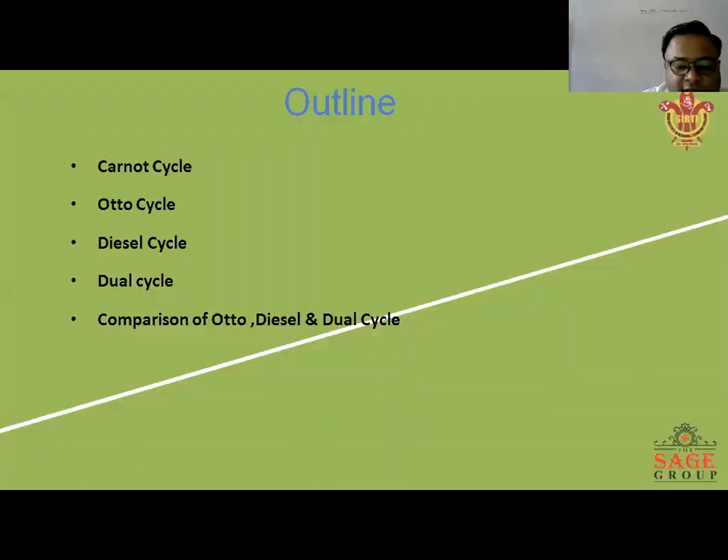The Carnot cycle is not a practical cycle, as already discussed in the previous class. There are two reservoirs, a high temperature reservoir and a low temperature reservoir, but there is no chance of it being absolutely 100% efficient.

This is because of the ideal processes which are used in the cycle, which prevent the cycle efficiency from being 100%.

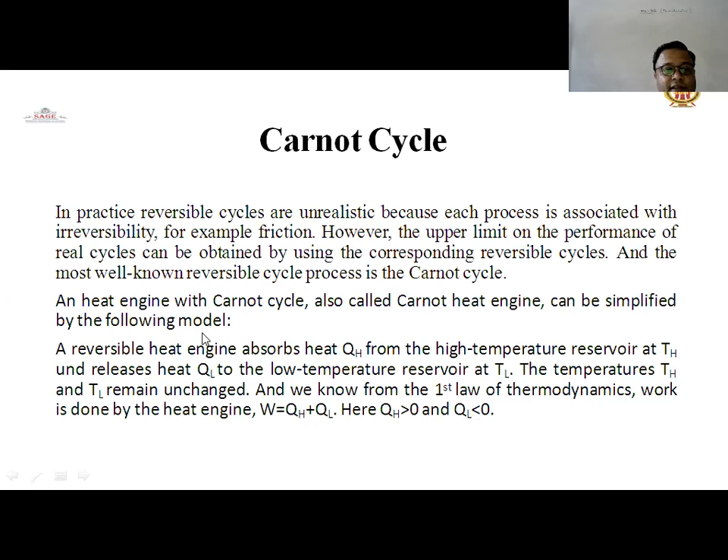This heat engine with the Carnot cycle can be simplified by the following model. There is a high temperature reservoir working at temperature TH, and a low temperature reservoir working at the lowest temperature TL.

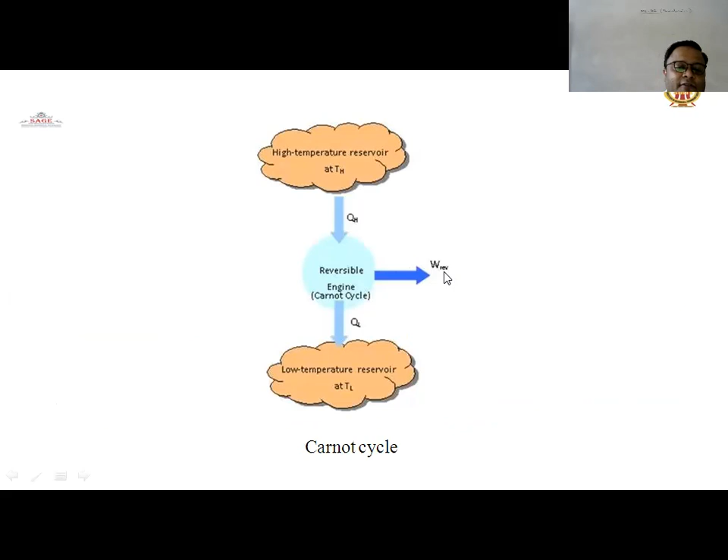A reversible heat engine operates between these two reservoir temperatures, the high temperature and the low temperature, and after all the working, the net work done by the reversible cycle is QH minus QL.

In process 1 to 2, isothermal expansion, heat is supplied by external sources. Process 2 to 3 is isentropic expansion, in which entropy remains constant.

Due to this, heat transfer remains zero during 2 to 3. Process 3 to 4 is isothermal compression, where heat rejection takes place to the sink body, and process 4 to 1 is isentropic compression, where heat transfer is again zero.

This is the Carnot cycle, the PV diagram explaining how the engine works. But in practice, Carnot cycle efficiency cannot be achieved at 100% because some of the processes involved in the cycle are lacking and cannot be fully achieved in the practical case.

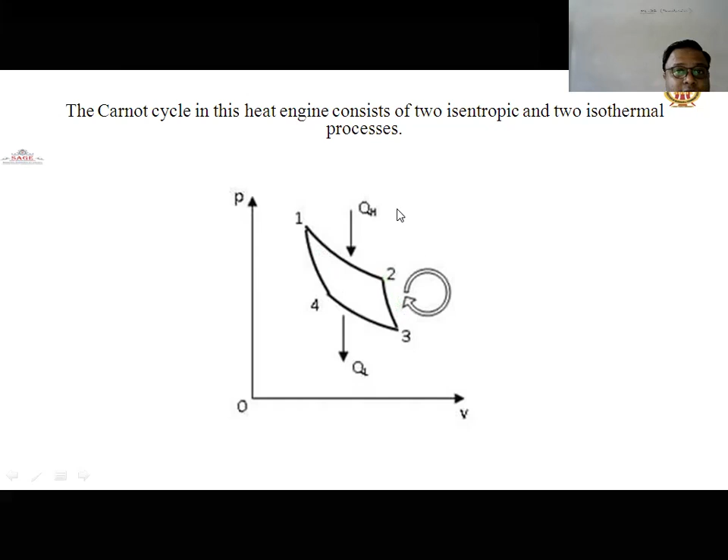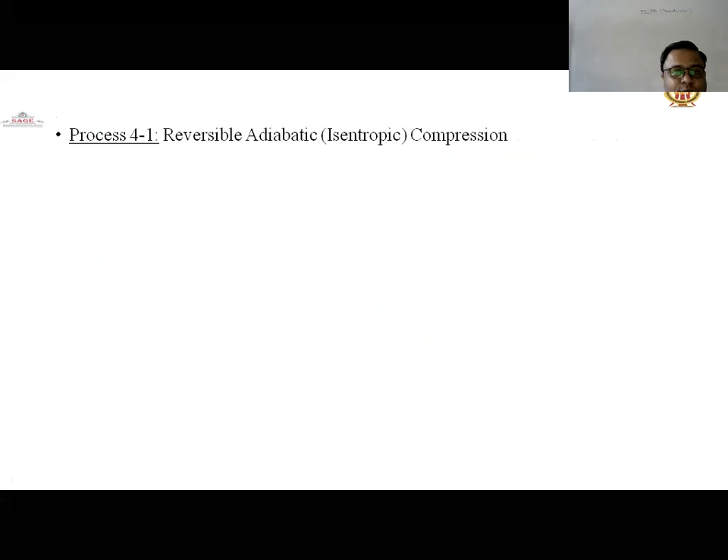These processes were already discussed in the diagram. Process 4 to 1 is the last process, adiabatic isentropic compression, where the engine is perfectly insulated so that no heat is lost and absorbed, and the gas continues being compressed slowly until the temperature rises.

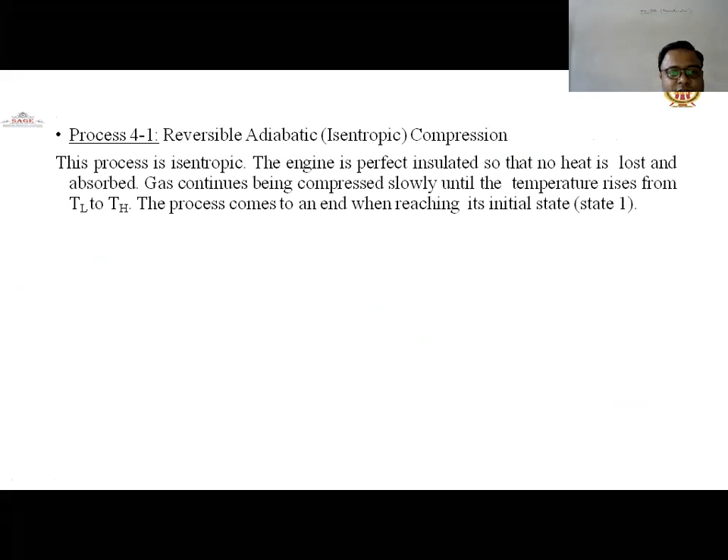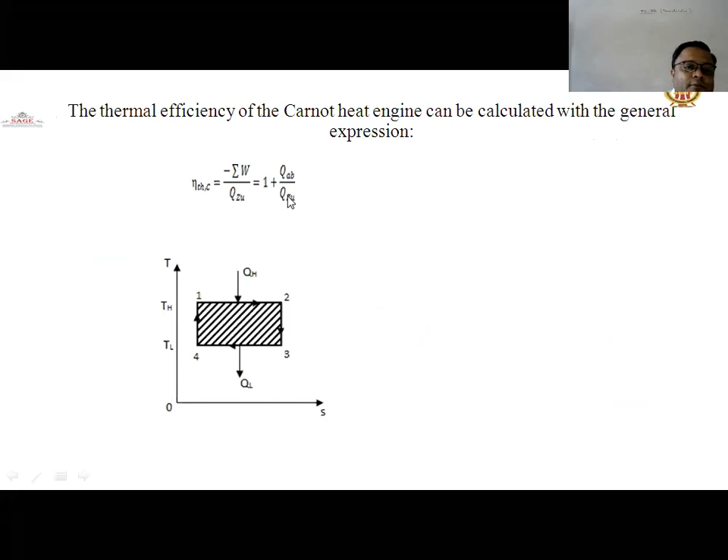Using the TS diagram, we obtain the parameter 1 minus TL by TH. This is the main fundamental equation of the thermal efficiency of the Carnot cycle, and this equation is also referred to as the Carnot efficiency.

इसको Carnot cycle की efficiency के रूप में भी जाना जाता है। तो जो आप देख रहे हैं कि थर्मल efficiency Carnot cycle की इन प्रैक्टिकल केस 100% नहीं रहती है।

उस efficiency को 100% बनाना है तो प्रोसेस ऐसी बनानी पड़ती है ताकि वो रियल प्रैक्टिस में वर्क कर सके और इफिशिएंसी को इम्प्रूव कर सके। किसी भी साइकिल या इंजन की इफिशिएंसी 100% नहीं होती है।

क्योंकि ऐसी मशीन जो कि विदाउट कंज्यूमिंग ऑफ एनी एनर्जी, इट विल प्रोड्यूस द कंटिन्यूअसली वर्क - हाउ इट इज पॉसिबल? ऐसी कोई भी मशीन बनाना इम्पॉसिबल है जो कि कंटिन्यूसली वर्क प्रोड्यूस करे, किसी भी एनर्जी को कंज्यूम किए बगैर।

सपोज आपकी मोटरसाइकिल है, यदि आप सोचें कि चला लें कंटिन्यूसली बिना पेट्रोल के, तो हाउ इट इज पॉसिबल इन अ प्रैक्टिकल केस? दिस इज द परपेचुअल मोशन ऑफ द मशीन फर्स्ट काइंड, जो कि इम्पॉसिबल केस है।

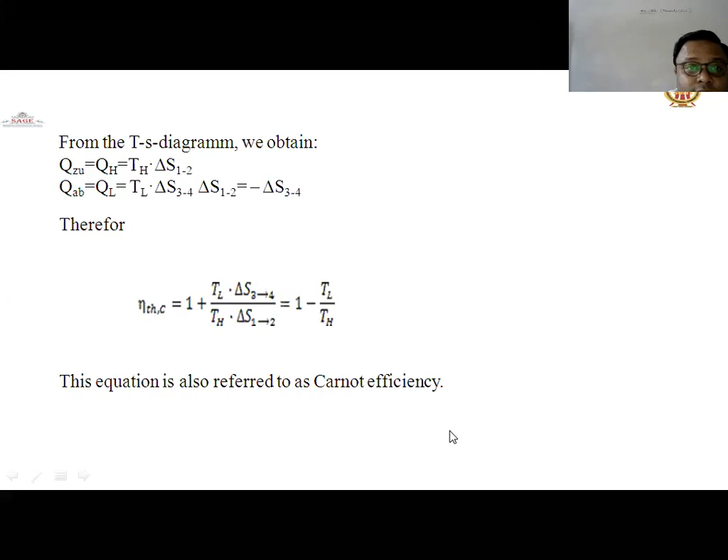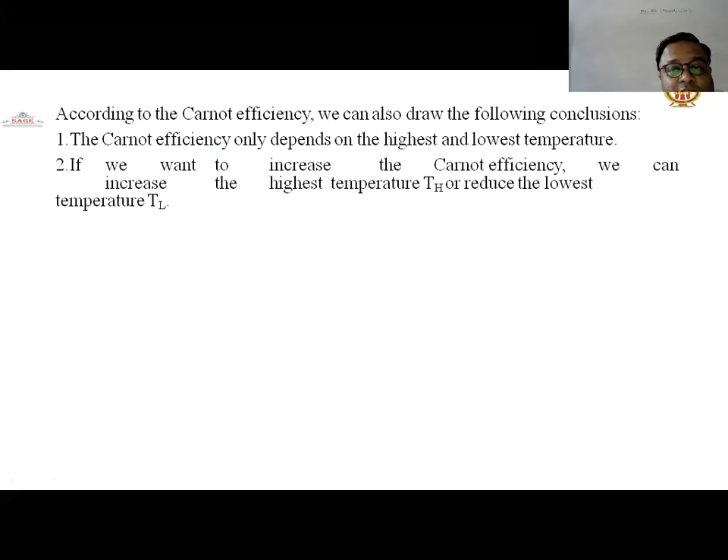यदि आपको चाहिए कि कार्नोट साइकिल की एफिशिएंसी बढ़ जाए, तो आप हाईएस्ट टेम्परेचर ज़्यादा से ज़्यादा बढ़ा दीजिए या लोएस्ट टेम्परेचर को कम से कम कर दीजिए। और यदि कार्नोट एफिशिएंसी और बढ़ानी है, तो उसके लिए दूसरी मेथडोलॉजी भी अपनानी पड़ती है - रीजनरेशन करिए, रीहीटिंग करिए।

बट इट इज नॉट पॉसिबल इन अ प्रैक्टिकल केस बिकॉज ऑफ सम लिमिटेशंस। कुछ लिमिटेशन हैं जिसकी वजह से हम एडिशनल मेथड अडॉप्ट नहीं कर पाते हैं। तो कार्नोट हीट इंजन की एफिशिएंसी हमेशा कम रहती है 1 से।

यदि इंजन की एफिशिएंसी बढ़ानी है तो उसके लिए हमें कुछ काम करना पड़ता है या उसे एडिशनल आउटपुट देना पड़ता है, जिसकी वजह से आपको इनपुट देना पड़ता है ताकि हम उसमें कुछ वर्क डन कर सकें।

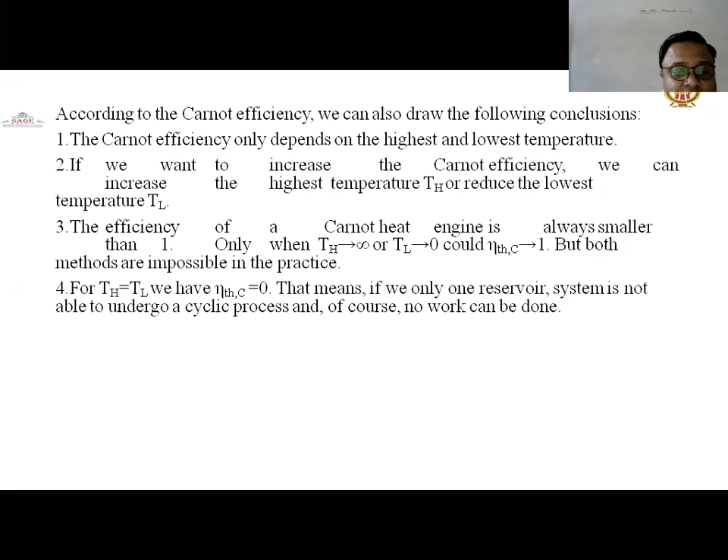यहाँ पे TH इक्वल टू TL यदि हम लेके चलते हैं तो कार्नोट साइकिल एफिशिएंसी 0 हो जाती है, बिकॉज TH इज इक्वल टू TL। That means if only one reservoir, the system is not able to undergo a cyclic process।

और इस केस में कोई भी वर्क डन आपको नहीं मिलेगा, no work can be obtained। As mentioned above, the Carnot cycle is a reversible process which delivers the most work output for a heat engine operating between the same temperature limits।

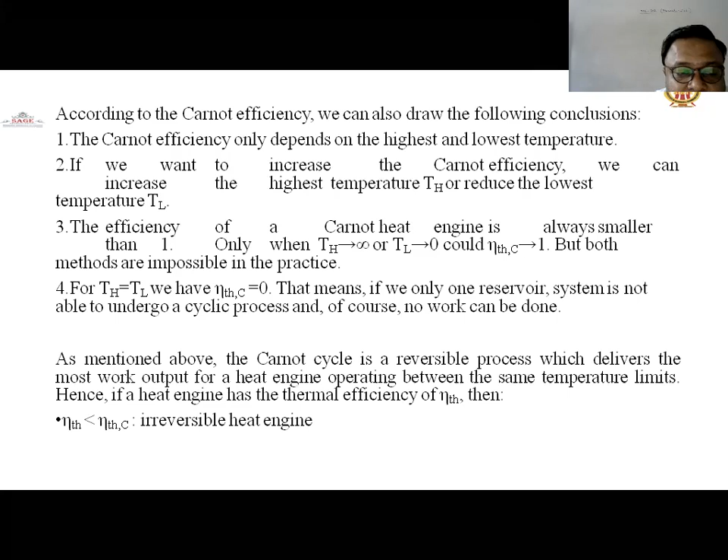If the heat engine has a thermal efficiency, then the thermal efficiency of the normal engine is less than the thermal efficiency of the Carnot engine, that is called an irreversible heat engine.

इस केस में हम बोल सकते हैं कि यदि कार्नोट साइकिल एफिशिएंसी बहुत ज़्यादा है तो उस केस में जो नॉन रिवर्सिबल से चला इंजन है, उस इंजन की एफिशिएंसी बहुत कम रहेगी।

दिस इज द फंडामेंटल। तो थर्मल एफिशिएंसी इरिवर्सिबल या बोलना चाहिए नॉर्मल इंजन की कार्नोट के बराबर है, इट मींस द रिवर्सिबल हीट इंजन है।

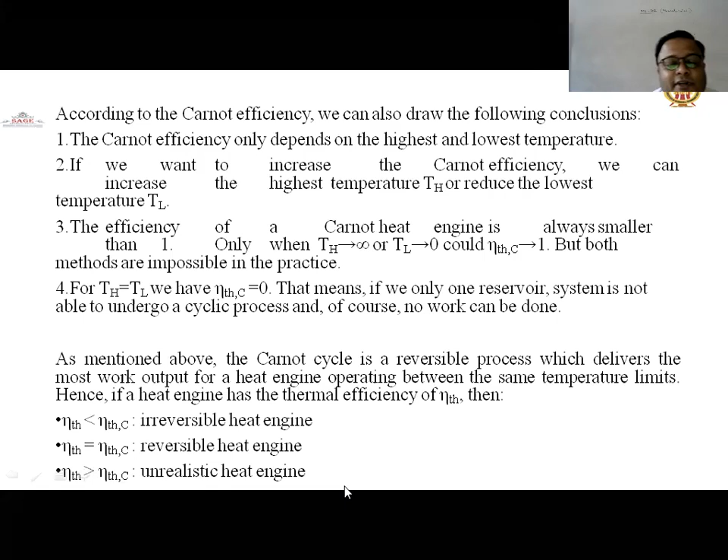एंड द थर्ड वन इज व्हेन थर्मल एफिशिएंसी ऑफ द नॉर्मल इंजन इज ग्रेटर दैन कार्नोट एफिशिएंसी, दैट इज द अनरियलिस्टिक हीट इंजन। ऐसा इंजन बना पाना इम्पॉसिबल रहता है जिसकी एफिशिएंसी कार्नोट इंजन की एफिशिएंसी से ज्यादा रहे।

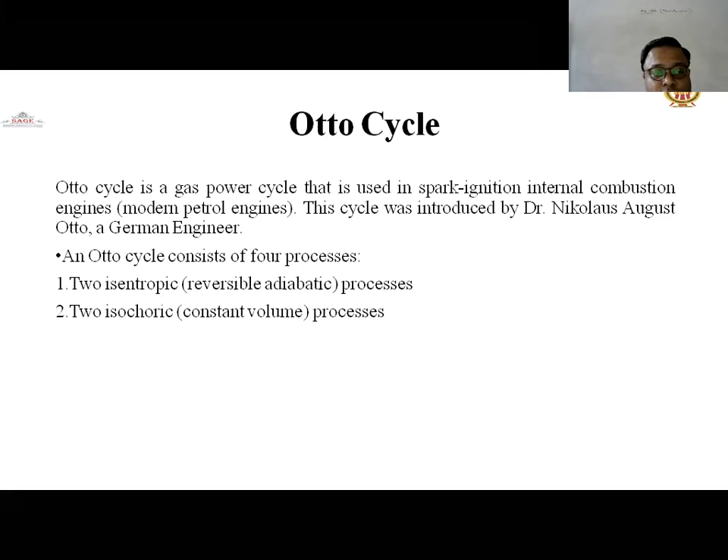ऑटो साइकिल की हमने ऑलरेडी बात की थी, निकोलस अगस्ट ऑटो नाम के साइंटिस्ट ने, जो कि जर्मन इंजीनियर था, उसने ऑटो साइकिल को बताया था। इसका यूज पेट्रोल इंजन की गाड़ियों में किया जाता था। इट कॉन्सिस्ट्स ऑफ 4 प्रोसेस - दो आइसेंट्रोपिक होती हैं, रिवर्सिबल एडियाबैटिक, और 2 आइसोकोरिक होती हैं।

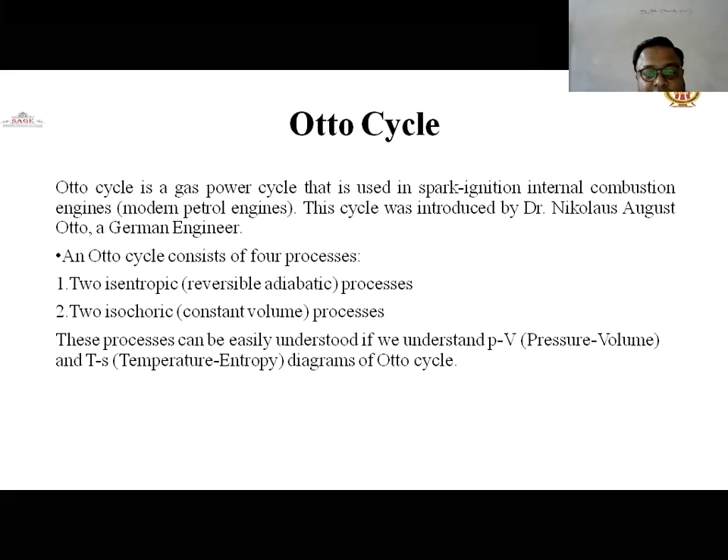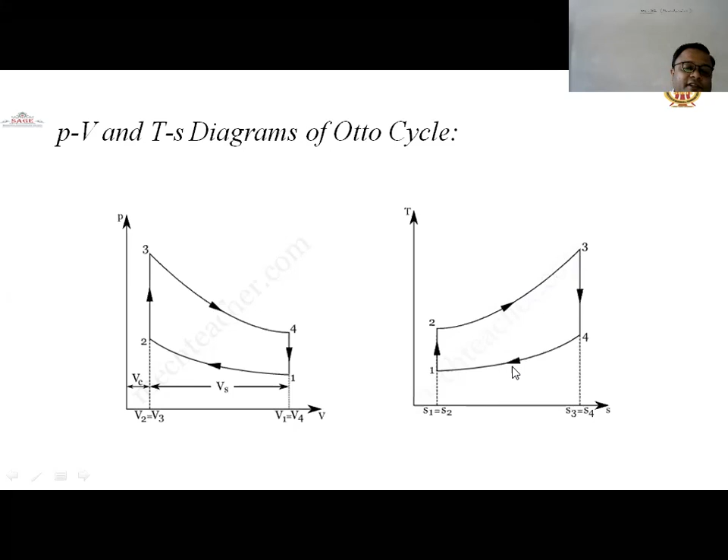The TS diagram shows the heat transfer, how much amount of heat is added in the heat addition process, and how much amount of heat is rejected in the heat rejection process, which is taking place in the constant volume process.

These are the processes already discussed in the Otto cycle. Process 1 to 2 is isentropic compression, when the piston moves from BDC to TDC, entropy remains constant, heat transfer is 0, pressure increases from initial to final condition, temperature increases from T1 to T2, and volume decreases from V1 to V2.

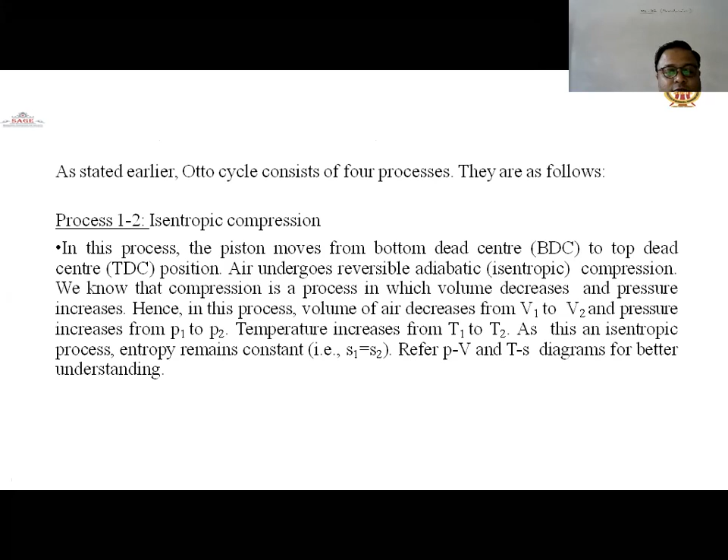The process 2 to 3 is constant volume heat addition, in which heat is supplied. During this constant volume process, heat supply is represented by mCv(T3 minus T2), where m is the mass, Cv is the specific heat at constant volume.

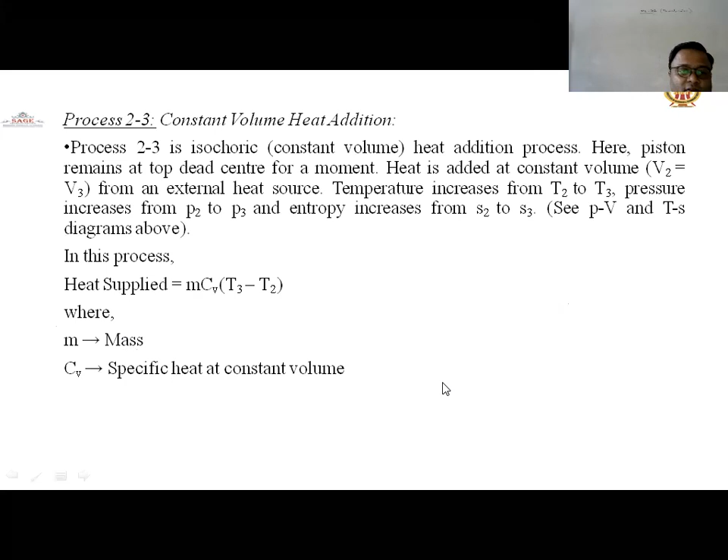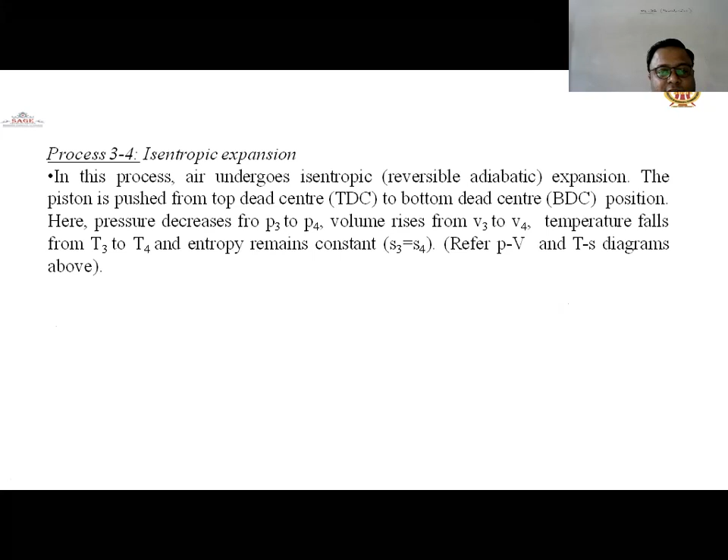Process 3 to 4 is isentropic expansion, in which the expansion of gases takes place, and the piston goes from TDC to BDC, with entropy remaining constant because of the isentropic expansion.

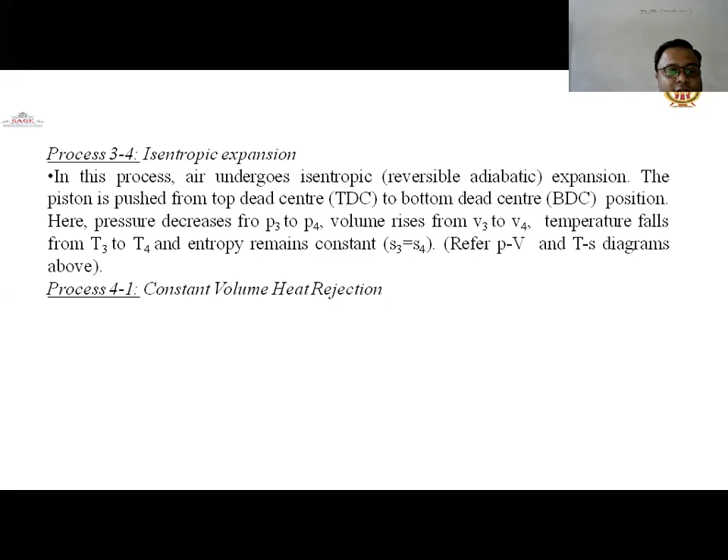4 to 1 is constant volume heat rejection, in which exhaust gases escape to the atmosphere. The total volume remains constant during this process, temperature decreases from T4 to T1, and entropy decreases due to the heat rejection process, so entropy decreases from S4 to S1.

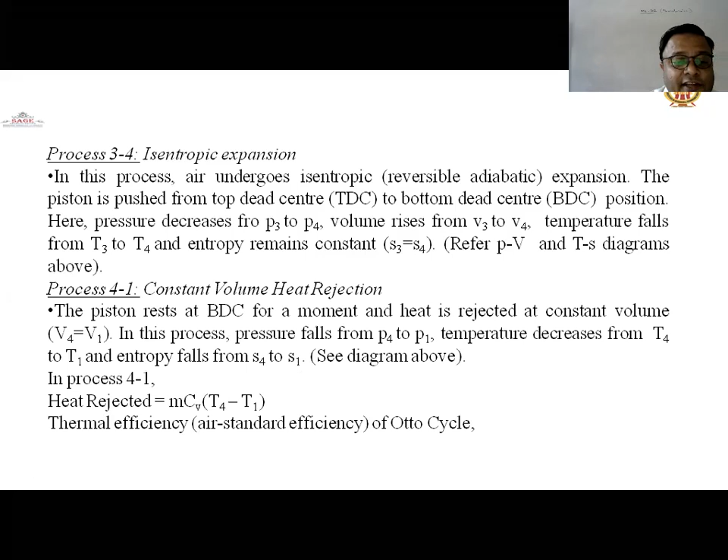The heat rejection is represented by mCv(T4 minus T1). This is the mathematical equation. Thermal efficiency equals mCv(T3 minus T2) minus mCv(T4 minus T1), all divided by the heat supply mCv(T3 minus T2).

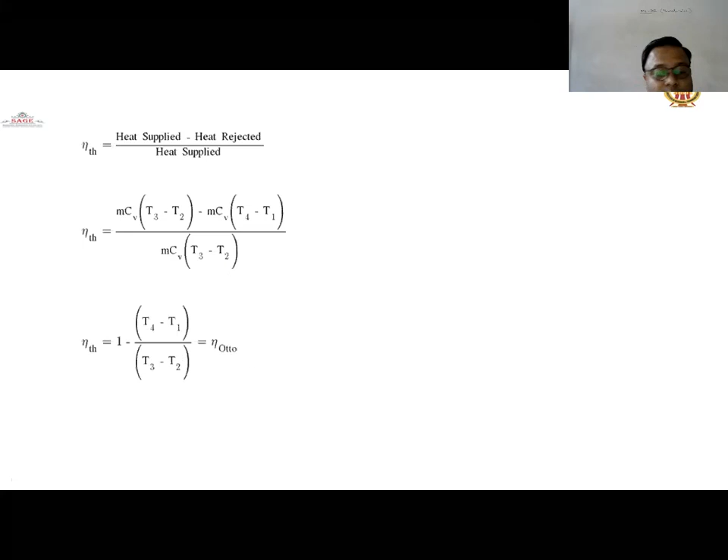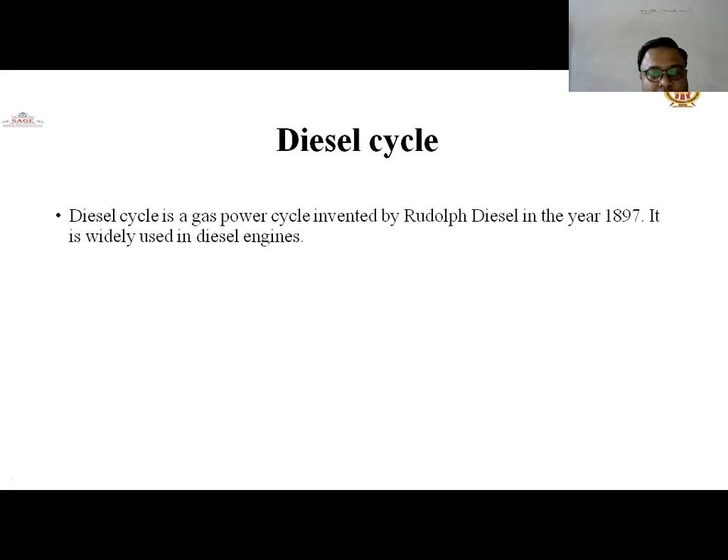In fact, in this case only air enters from the outside into the combustion chamber or compressor side, and this cycle's heating is done at constant pressure instead of constant volume. The Diesel cycle can be understood well if you refer to the PV and TS diagrams.

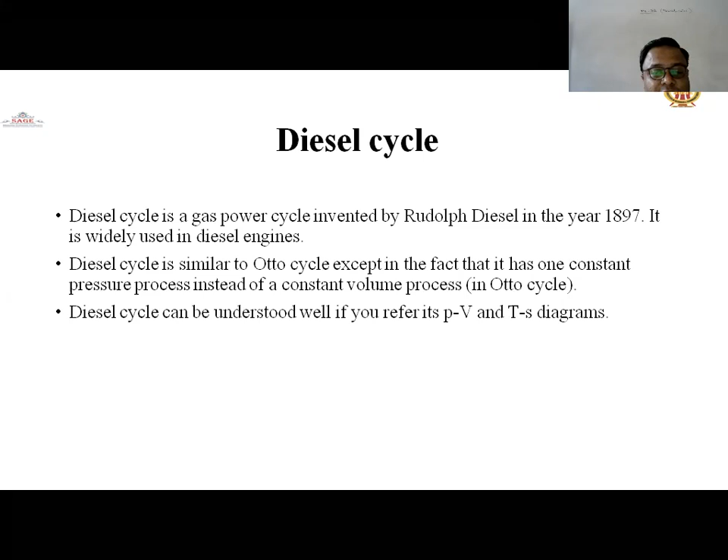At point 2, fuel is admitted into the combustion chamber from the fuel injector side, and heat addition takes place. After the fuel and air combine through the fuel injection process, combustion is initiated, continuing until it is cut off at point 3.

This is the constant pressure heat addition. After that, expansion takes place - 3 to 4 is the process of isentropic expansion, in which entropy remains constant because of the isentropic expansion going on.

4 to 1 is constant volume heat rejection, in which heat goes out to the outside in the form of exhaust gases into the atmosphere.

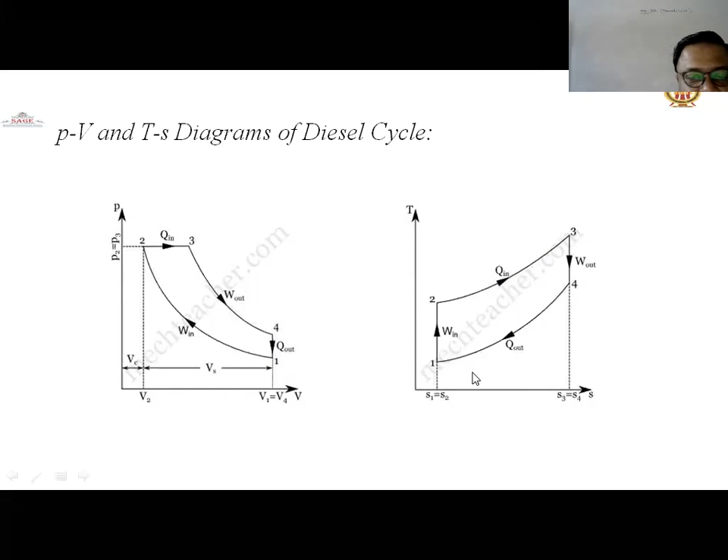Process in the diesel cycle: isentropic compression. The piston moves from bottom dead center to top dead center. Air is compressed inside the cylinder. Pressure increases from P1 to P2, temperature increases from T1 to T2, and volume decreases from V1 to V2. Entropy remains constant. Work is done on the system in this process, denoted by Win in the diagram above.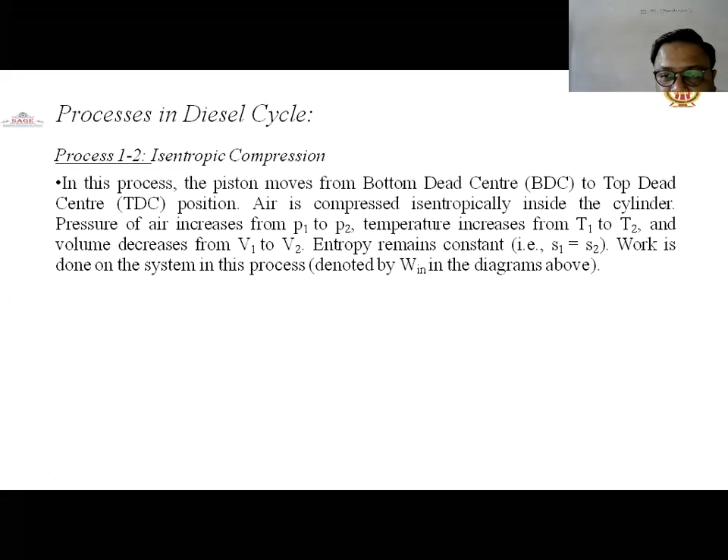Process 2 to 3 is constant pressure heat addition. Heat is added at constant pressure from the external heat source, already discussed. Process 3 to 4 is isentropic expansion, already discussed, when the piston moves from TDC to BDC.

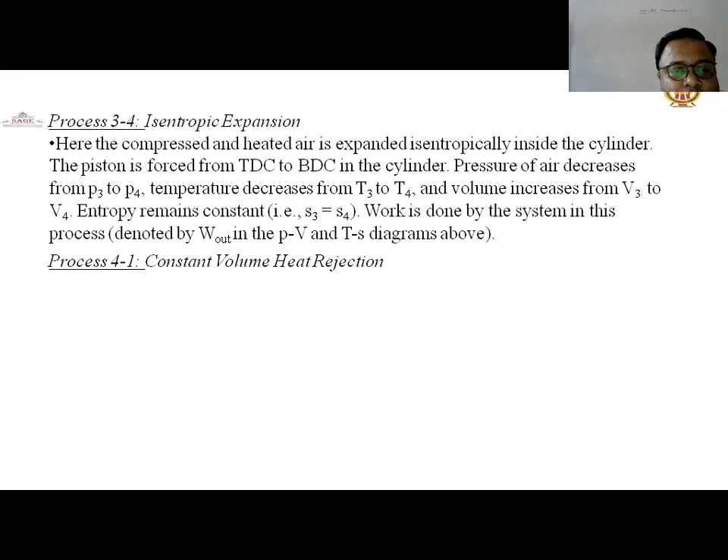Process 4 to 1 is constant volume heat rejection. In this process, heat is rejected at constant volume. Pressure decreases from 4 to 1, temperature decreases from 4 to 1, and entropy decreases from 4 to 1. The heat rejection process at constant volume is MCv times (T4 minus T1) kilojoules.

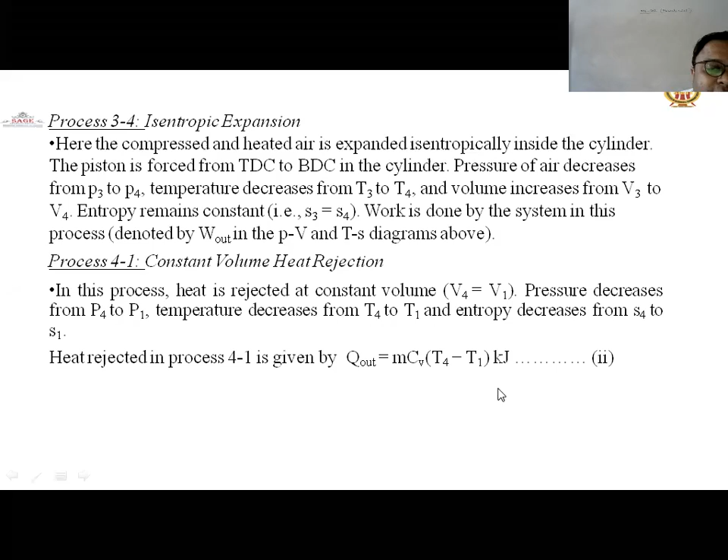This is the dual cycle, already discussed in the study class. In the dual cycle, there are a number of processes taking place. Partial heat addition takes place in a constant volume process, and partial heat addition takes place in a constant pressure process. So there is a combination of heat addition processes.

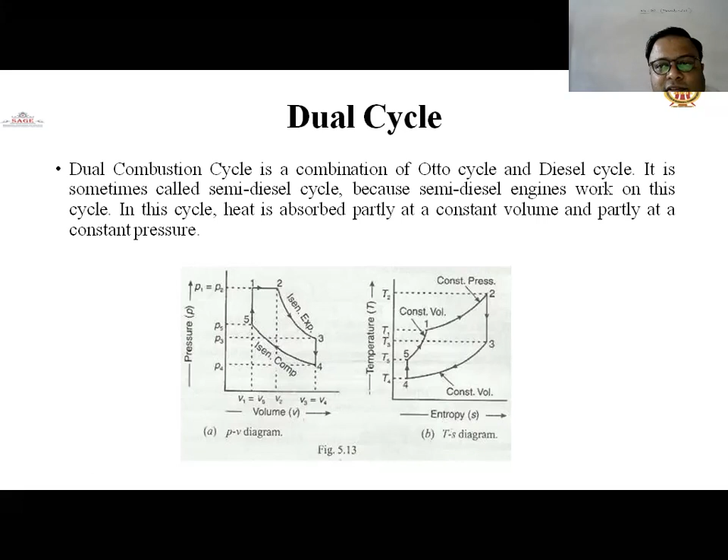The formula is: efficiency equals 1 minus [1 / (r^(gamma-1))] times [(alpha*rho^gamma - 1) / (alpha - 1 + gamma*alpha*(rho - 1))], where alpha is the pressure ratio, rho is the cutoff ratio, and r is the compression ratio, V4 by V5, is equal to V3 by V1, cutoff ratio is V2 by V1 equal to V2 by V5, and alpha is the pressure or expansion ratio.

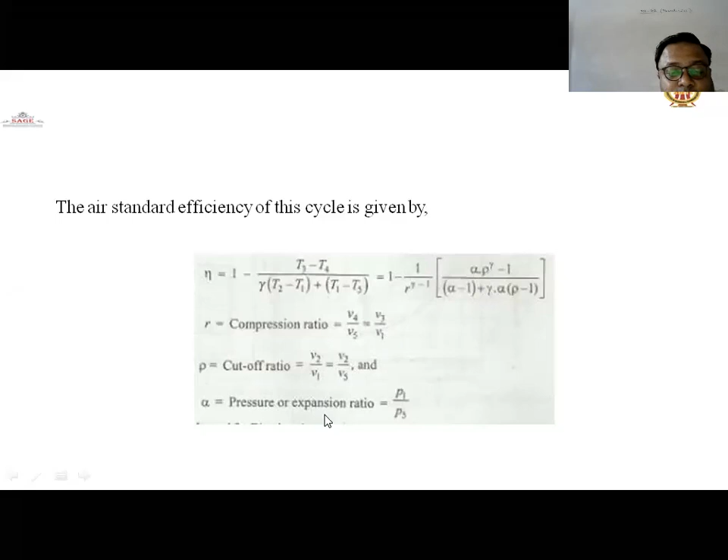So the ideal dual combustion cycle consists of two reversible adiabatic or isentropic processes, two constant volume processes, and one constant pressure process, and these processes are represented in the PV and TS diagrams.

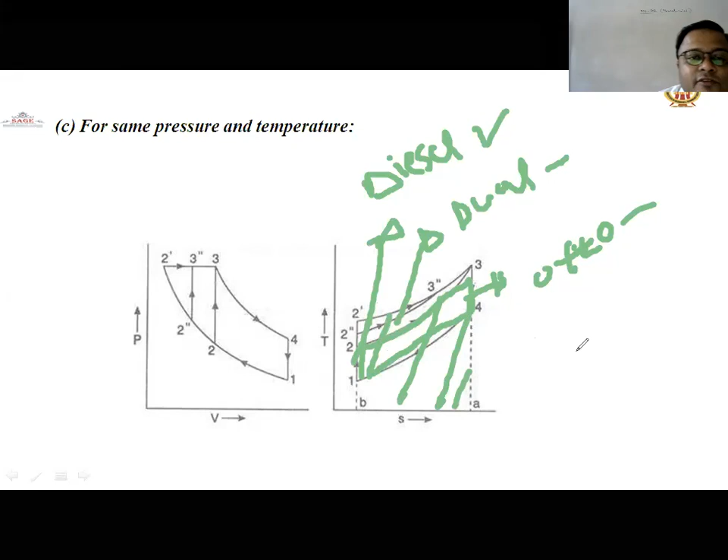This is the heat transfer area. This is more in case of this case. And the heat rejection, this is taking in this case. To yadi aap dekhenge to heat rejection is the constant, not a variable form. But the heat addition is more in the Diesel cycle. So that's why we are calling ki jo cycle efficiency hai is case mein wo zyada rahegi.